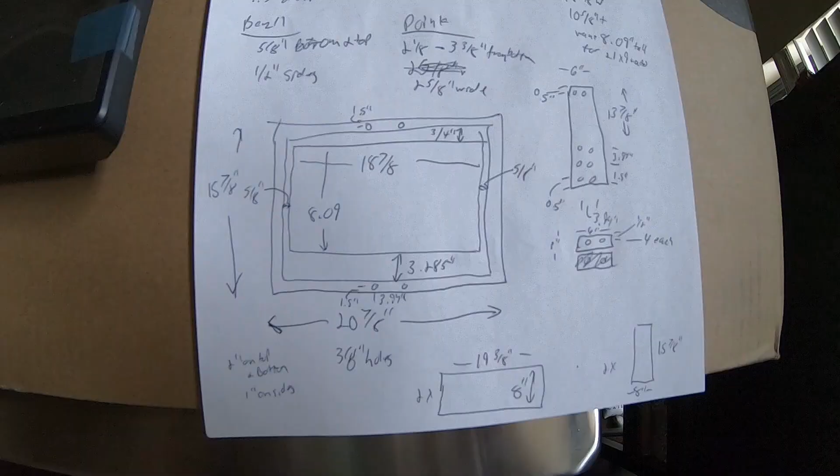So let's do some design in here. Scratch figuring. Basically this is what it's going to look like. We got our little inset here that only shows the visible area.

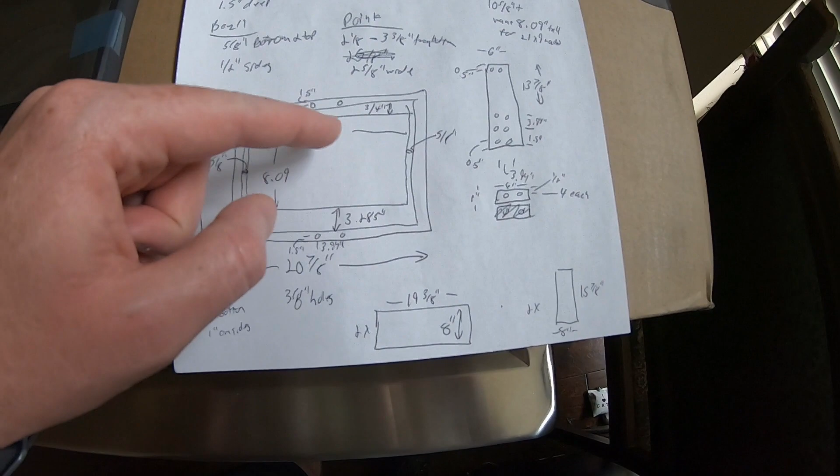Then we got the inset that's kind of wide on the bottom to cover up the part we don't want showing, so we have our proper aspect ratio. Then the outside cover. And then here's the mount, the flat part that'll go on the back like we had on the other part, with some spacers on the DMD or back glass, whatever monitor.

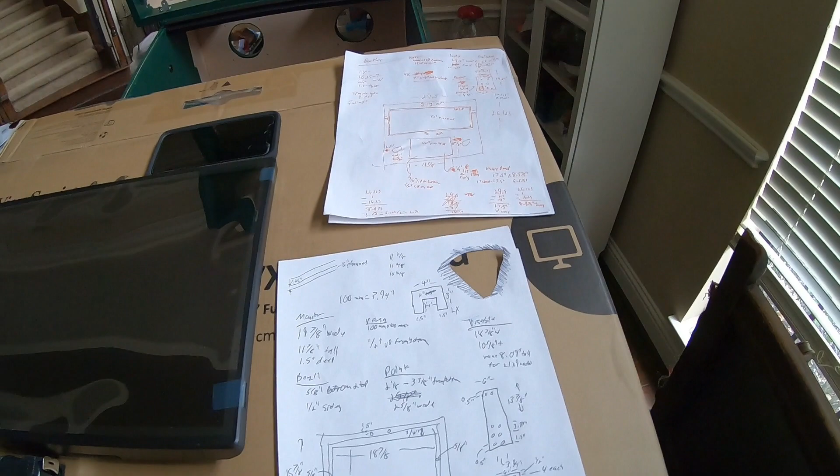Here's the sides of the box. And then here's the little piece we need to cut for the kickstand for the main monitor. So let's go draw this up in AutoCAD real quick, or not AutoCAD, FreeCAD.

The front looks pretty good. One thing that irritates me about FreeCAD is you can't draw something in the middle here for it to cut out, because it doesn't support 2 independently floating bodies.

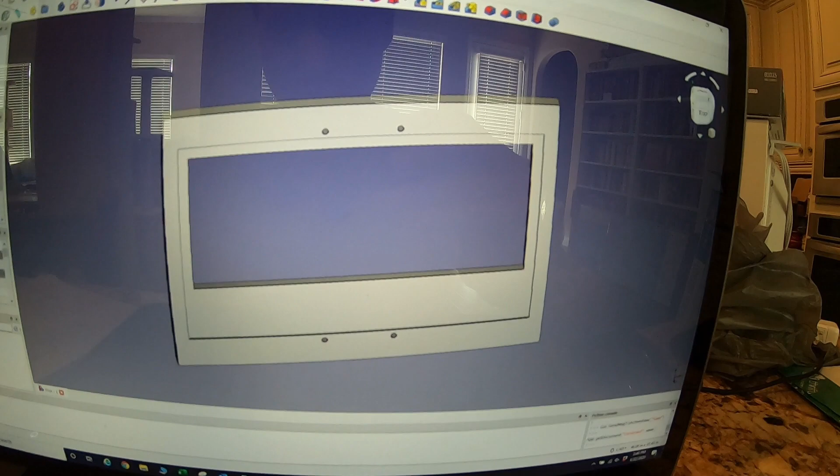So that's aggravating. That means rather than having one file where you can just hit cut and it does all of it, you have to do this one by one. It doesn't take much longer, but God, it's irritating. You just can't hit go.

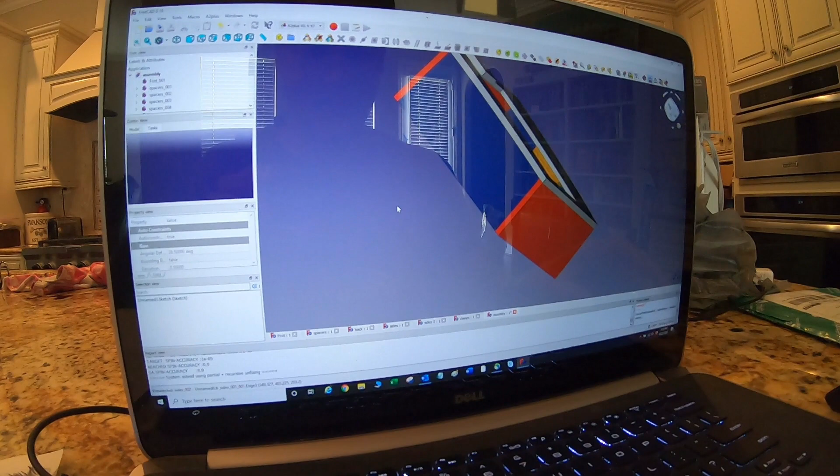It's good to assemble it in 3D space here, because you'll find your mess ups. I didn't show you, but I did mess up this blue part, it's the same part but I had it an inch too short. So after assembling it, I was able to see that and fix it before cutting and wasting wood and all that nonsense.

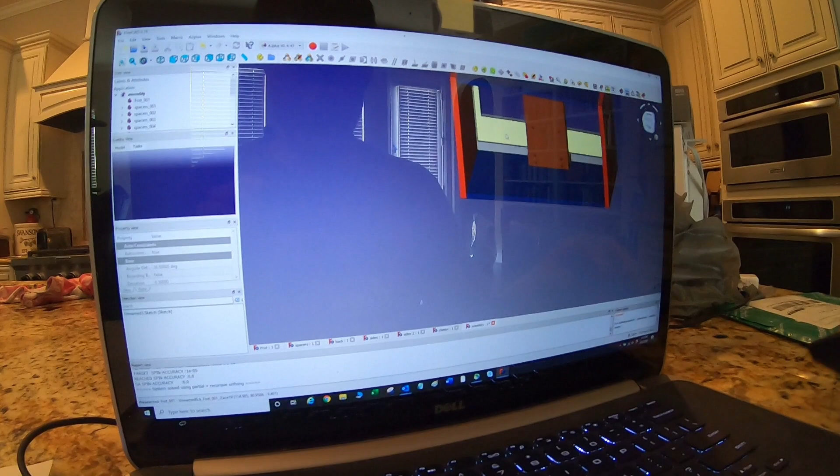So you can see it's got the little indent right here to where my stuff's gonna go. It's got a little space here for the bolts to go through, and I'm gonna leave this back open. I can put a door on it if I want, but you're not gonna be able to see it, it's up against the wall. And it's got the little space for the monitor.

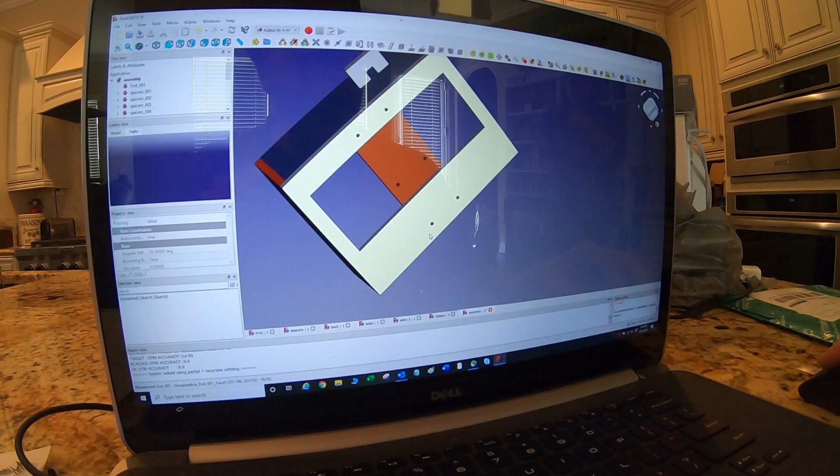It's got your little dead space here that I may put those 5 little flashers on. I haven't figured out how to mount them. I bought the ones without the 3 or the 2 screws on the side, so that kind of sucks.

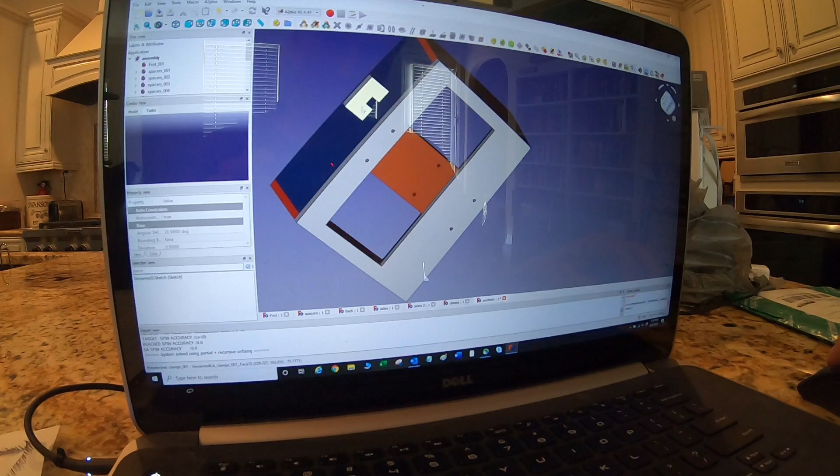So you got the bolt thing, and then this little chunk up here is just off by itself doing nothing. That's the clamp for the kickstand on the playfield TV. So I need to cut 2 of those as well.

Alright, now I'll make some G-code up here and go out to the Maslow.

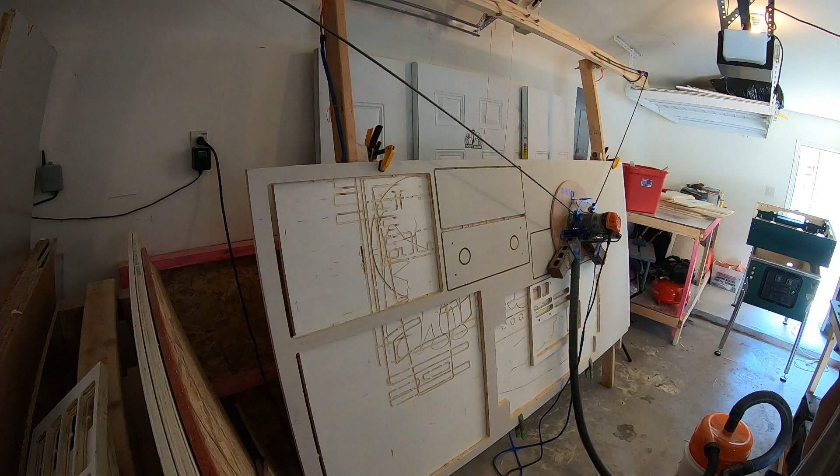Alright, well we built this box. Sorry, my GoPro battery died while I was doing the time lapse, so hopefully I got a lot of it, but that's the bottom, obviously.

Fits alright. Gotta wait for all the putty here to dry, and then we'll sand it and paint it. There's all the other pieces, clamps. I forgot to put this hole in when I was CNCing, so it kind of looks sloppy.

It still needs another coat of paint, but I'm gonna wait for that to dry. So this, I drilled this little hole here so the start button would fit. Kind of expanded this a little bit. I might throw another coat of paint on the front so it doesn't look like shit, but it fits in there now.

You can kind of see, I cut the little holes for the cords, and the bolt holes actually came through here, so I don't know if I'm gonna be able to use the front ones, but we'll see.

I think the back box, or the front monitor, might fit there, so I may have to drill more holes back a little farther. Alright, so then I ground these, or routed these seams in here

for the addressable LEDs. Figured if they were recessed a little bit, the TV wouldn't hit them.

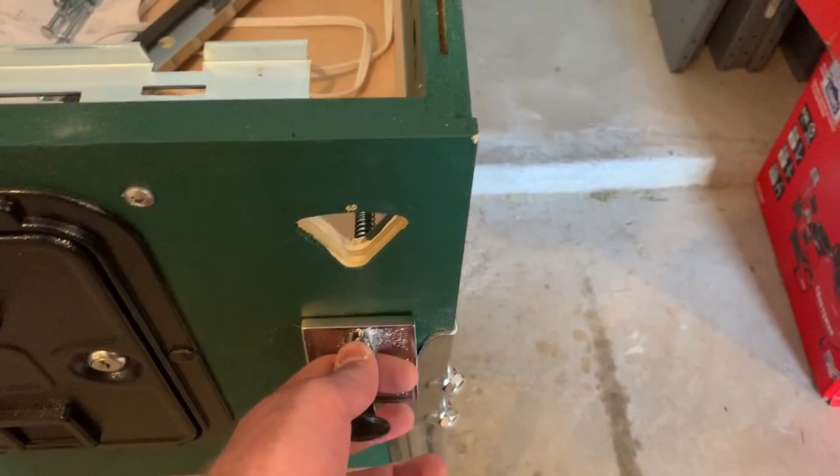It is a little bit low, but that's all right. Let's see what happens.

Alright, probably gonna end the video right there. So I'm gonna put another coat of paint on this tonight and one more tomorrow, and then I'll see if those need it, just touch up the insides.

And then let them dry for a while, and come back next time and hopefully get this friggin' thing, monitors at least, done so we can move on to something more fun.